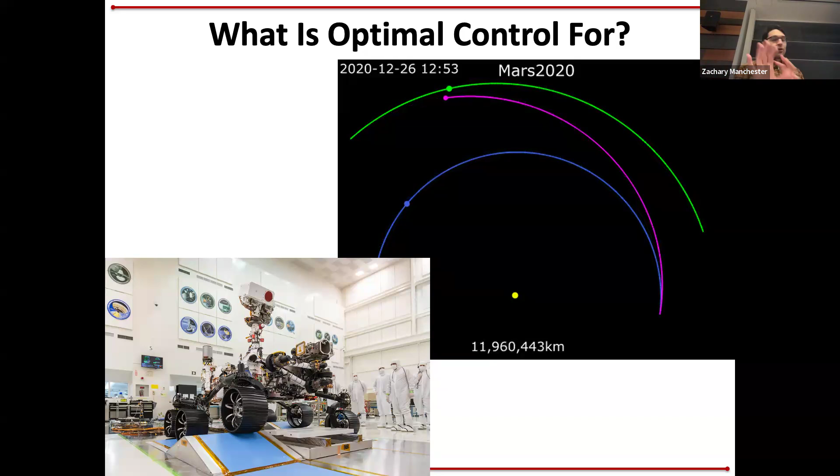Sort of veering away a little bit from this classical case, but still very much in the aerospace vein, like another application for this stuff that's super current still, but from the traditional aerospace end of things, is landing rockets. Everyone's seen SpaceX land these things on barges. Anyone know how they do this? Yeah, there's like some convexification thing they do.

Yeah, so this was a seminal result about 10 years ago in control, in aerospace control. This guy, Lars Blackmore, another guy named Behçet Açıkmeşe. Lars now is the kind of GNC, head of GNC, basically head of control stuff at SpaceX now. And Behçet is a professor at University of Washington now, but they were both at JPL at the time, like 10 years ago. They figured out a really clever trick to turn this nonlinear, non-convex problem - to relax it into a convex problem.

So we're going to talk about this in the class. We're actually going to go through this as a case study later in the semester and show you exactly how this works. But basically, it's a magic math trick that sort of transforms this problem exactly from a nonlinear problem that's hard to solve into a convex problem that's easy to solve, and you can give all kinds of guarantees for it, and you can solve it fast online. So this was a beautiful theory result that ended up really quickly getting ported over into real applications. So these guys use it to land, and also JPL uses this stuff to land on Mars. Really cool application where a theoretical result really quickly went from academic paper to landing rockets, which is kind of awesome.

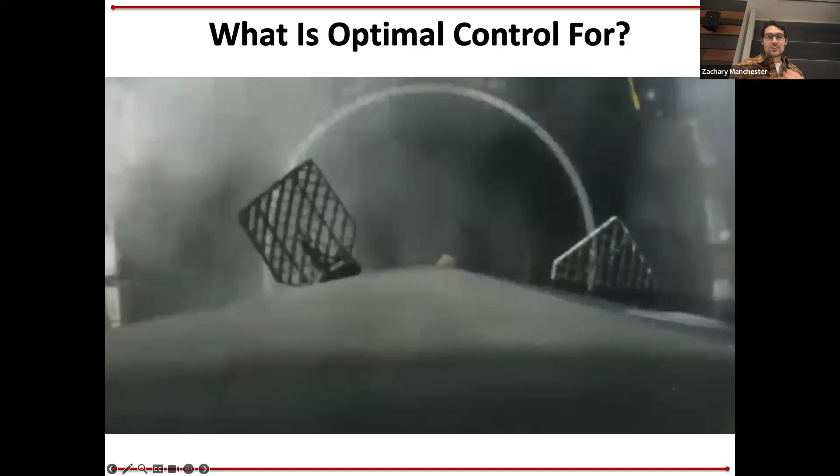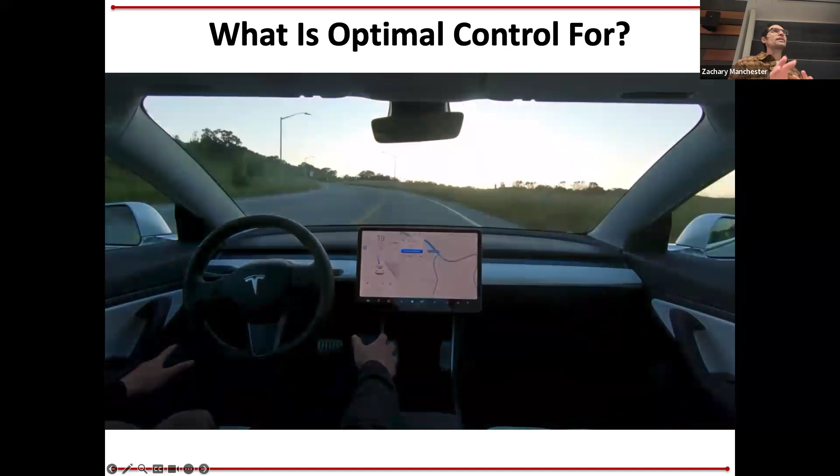Autonomous driving. Everyone's seen this stuff before. There's lots of buzz about how everyone's using deep learning to do this stuff, but that's mostly on the perception side and modeling human behavior. The actual driving of the car in almost all cases is still MPC.

People are doing nonlinear MPC with simple single track bicycle models for this stuff. They're using all this learning stuff to do perception, figure out where the other cars are, predict what human drivers are going to do, and feed that into an MPC stack at the end of the day that's actually planning trajectories, reasoning about the dynamics of the car, tire friction, all that kind of stuff, and doing the actual driving.

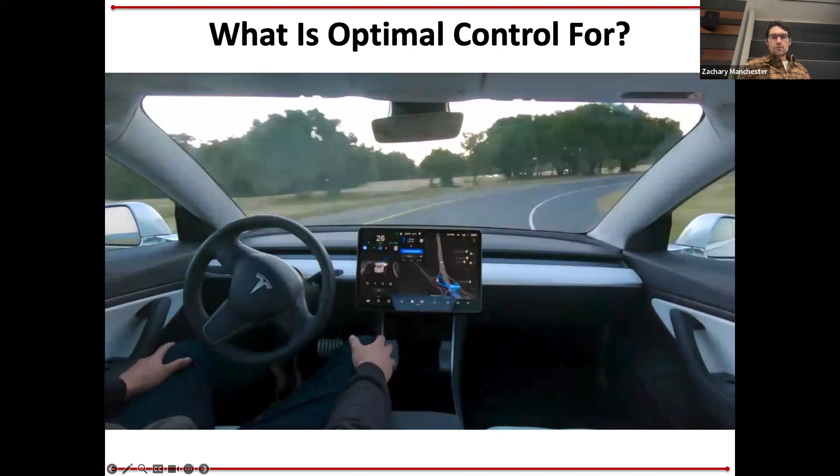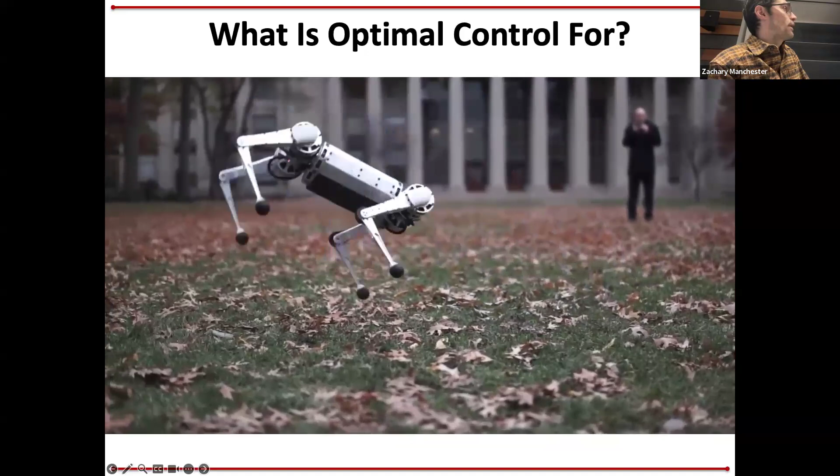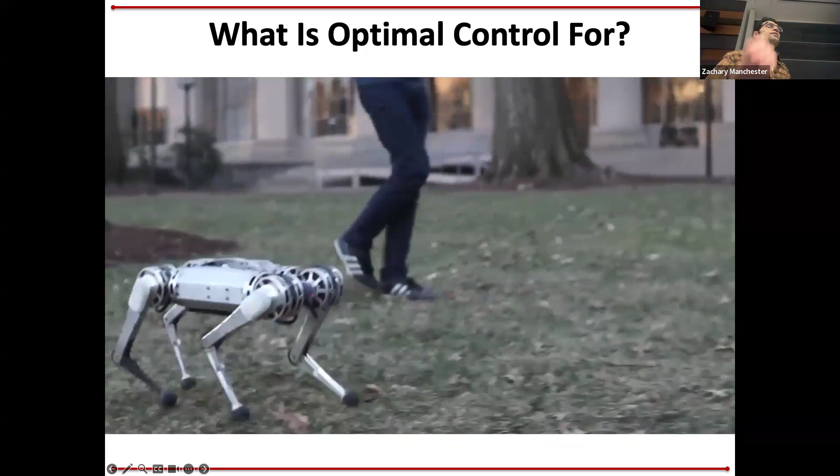What else we got? Everyone's seen this stuff too - this is getting kind of old, but more recently there's been a lot of RL results where people have really gotten RL controllers to work super well on these kind of robots. But the default controllers still on those quadrupeds are MPC, and there's a bunch of tricks in there to deal with non-smooth contacts and how the feet touch the ground.

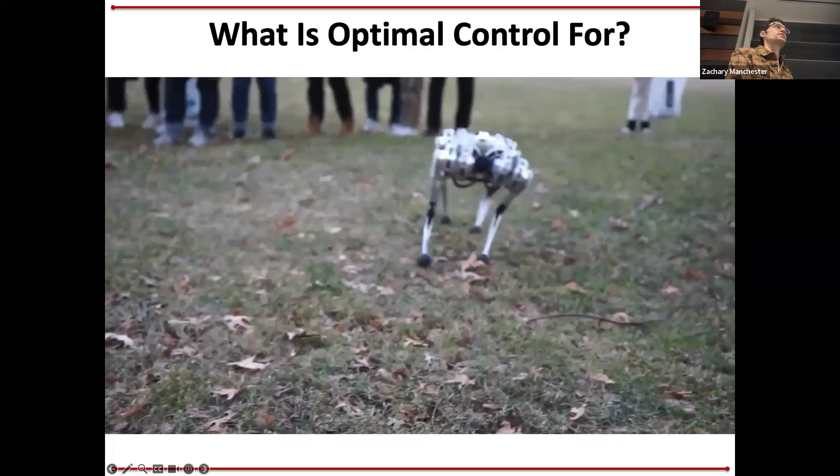We're going to talk about that later in class. So lots of tricks, but at the end of the day, this boils down to some pretty simple MPC with a bunch of heuristics for most of the legged robot stuff.

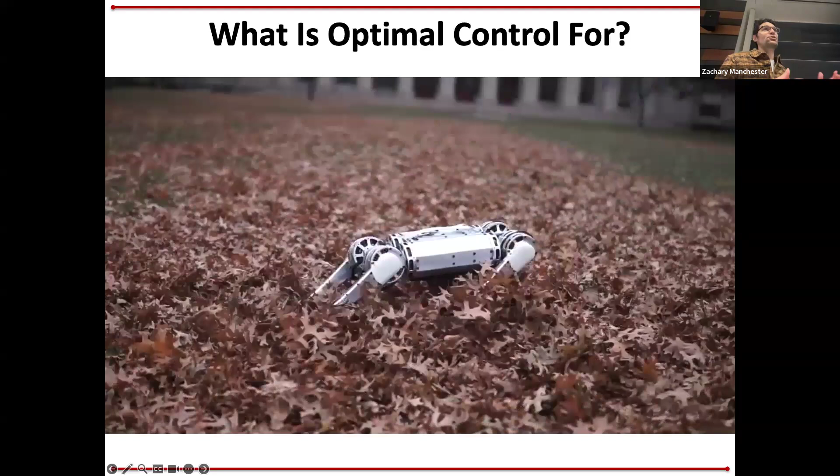The MIT Cheetah - Sangbae Kim at MIT really pioneered getting these things to work. Now these things are basically a solved problem and you can just buy them, but like 10 years ago this wasn't really possible. So it's really come a long way in a relatively short amount of time.

And mostly still MPC. Just in the last year or two, RL controllers have started to catch up to the MPC stuff and in some cases outperform MPC. But this is all MPC. We're going to talk about that stuff later in the class.

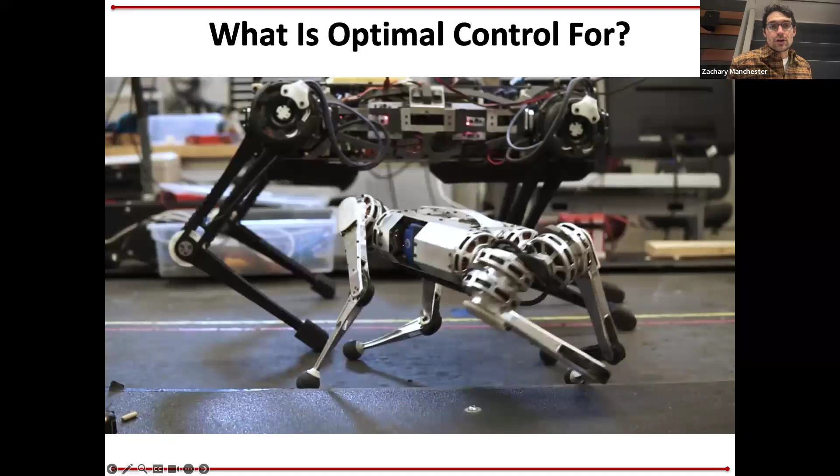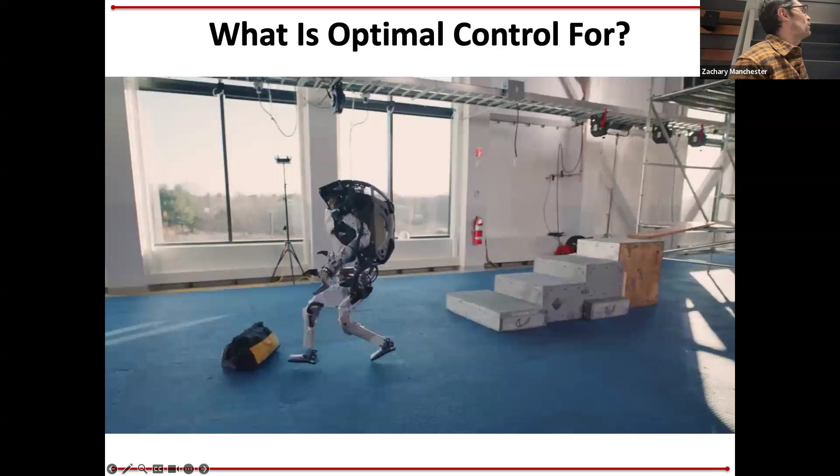And then obviously this stuff, humanoids. I actually went looking for new ones - everyone's seen the new Atlas, the electric one. There aren't very impressive demo videos of new Atlas out yet though. They're doing like factory manipulation stuff that just isn't that cool looking. So this is one of the cooler, recent-ish ones of them doing pretty dynamic manipulation and running around and backflips and all the good stuff that we've all seen on the old Atlas. No new Atlas videos doing this kind of stuff yet.

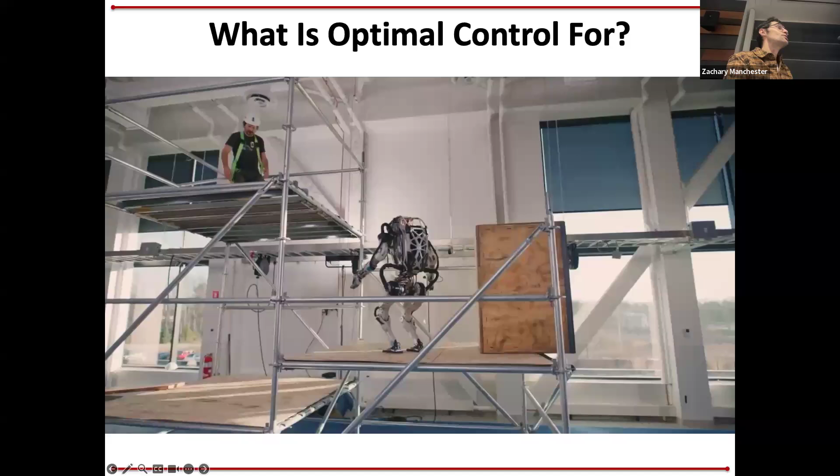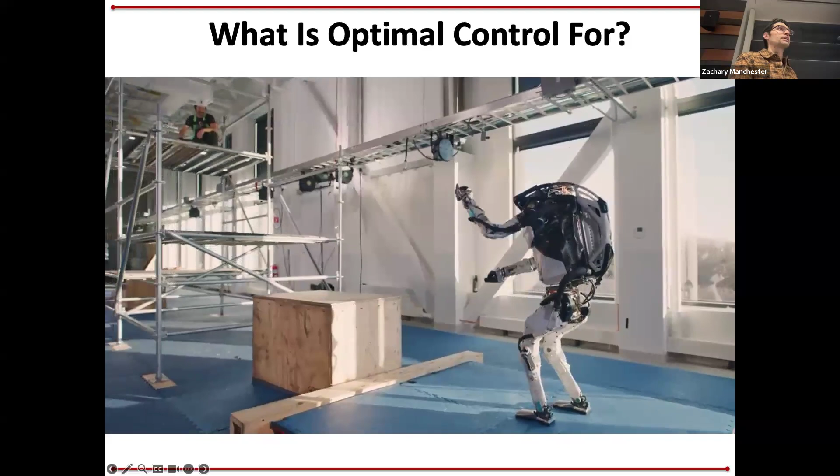But yeah, this stuff is all nonlinear MPC. This is them doing basically really hardcore nonlinear MPC with a whole body model of the robot, models of objects in the world, models of the contact dynamics, contact interactions between the robot and the world, and essentially just solving these really gnarly, pretty big nonlinear optimization problems at like hundreds of hertz in real time and running on the robot. So we'll talk a little bit about how this gets done too.

Any questions about any of this stuff? This is all the fun stuff. Just want to tease all the good stuff.

So I think pretty much everything I just showed you, we're going to do actually later in the semester. We're going to do case studies where I'm going to give you guys papers, recent-ish papers on all of these really cool, recent-ish robotics applications of this stuff. And we'll go through some of the secret sauce, how it works, and give you a fairly decent idea of how this stuff.

So by the end of the semester, at least at a high-ish level - I mean there's lots of details obviously, and the implementation work is tricky on all this stuff - but at least at a fairly in-depth level, you'll understand how all this stuff gets done, how to implement, in principle, controllers for these kind of systems, which is pretty awesome.

Okay, so just looking ahead, right? Like we do this stuff in our lab for our research - where are the current challenges and where's the hard stuff now? That stuff I just showed you is all kind of the last 10 years of awesome stuff. Where are we looking now into the future?

I'd say contact interactions are still a big deal. Planning multi-contact, long horizon, say manipulation or locomotion things, is still really hard.

That comes down to the fact that these contact dynamics, where you're making and breaking contact, are non-differentiable. So all the nice gradient-based optimization things we like to do kind of break. You can think about this as the limit of a very stiff but smooth nonlinear process, which is gross for gradient stuff, or as a discrete combinatorial optimization, graph-searchy kind of thing. Both are bad for different reasons: the graph search blows up combinatorially, exponentially in the size of the problem, and becomes intractable pretty quickly. The smoothed version ends up ill-conditioned and stiff in bad ways, suffering from local optima.

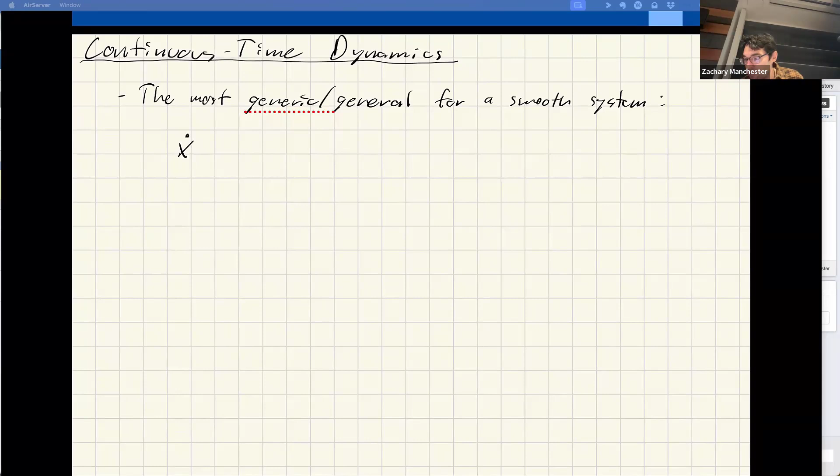Okay, so we're going to have a function that looks like this. So when we say dynamics, we mean this function, this f. This is called the dynamics. And it's a function that takes in a state vector - so that's the x, it's called a state.

And in our case, because we're doing control stuff, the u here is the input or the controls. So these two things are vectors. We generally say the state is a vector in Rn, so n-dimensional vector. And then the input is in general a different size vector than the state, and we usually use m for that dimension. So Rn, Rm - unfortunately those sound very similar, so it's confusing when it's said out loud.

And then this guy, x dot, this is the time derivative of the state vector. So this is a first order ordinary differential equation. That's what this is. You're maybe, if you've taken a basic dynamics course and you've seen F equals MA, Lagrangian stuff, that's a second order ordinary differential equation, right? So A is Q double dot, right? It's second derivative, it's acceleration. So, but we can always write this stuff in this form of a first order ODE.

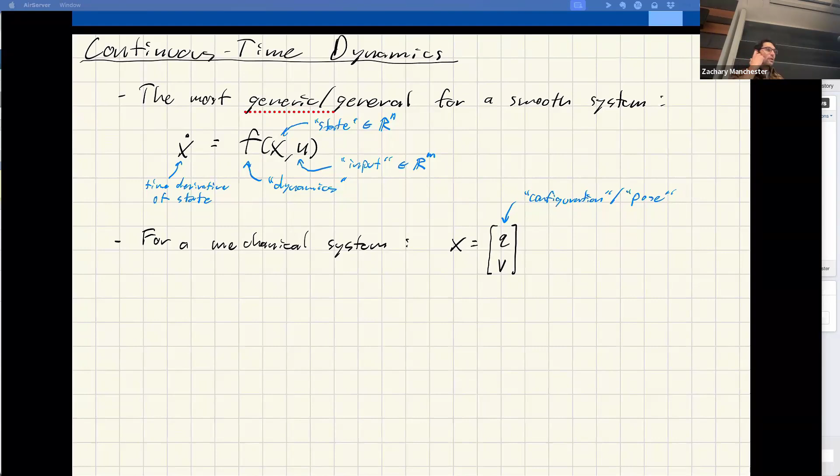So in particular, what I'm getting at is if I talk about rigid bodies, I talk about orientation, we have position and then we have attitude, or orientation. Attitude is not a vector. You can write it as a stack of 3 or 4 numbers, but those don't add like vectors. If you do roll, pitch, or switch the order and do pitch, roll, you get two different orientations. So that does not add like a vector. That's a more complicated, weird group thing we're going to talk about in the class, because it's super relevant to robotics, but more to come on that.

It's a weird thing, so to be clear, this is not always a vector. It can be some more complicated Lie group or manifold thing that has more structure, which we'll talk about. And then this V down here is the velocity. So fun fact: even if Q is not always a vector, V always is a vector, which is kind of weird and not obvious why that's the case. More to come on that, we'll talk some more about it.

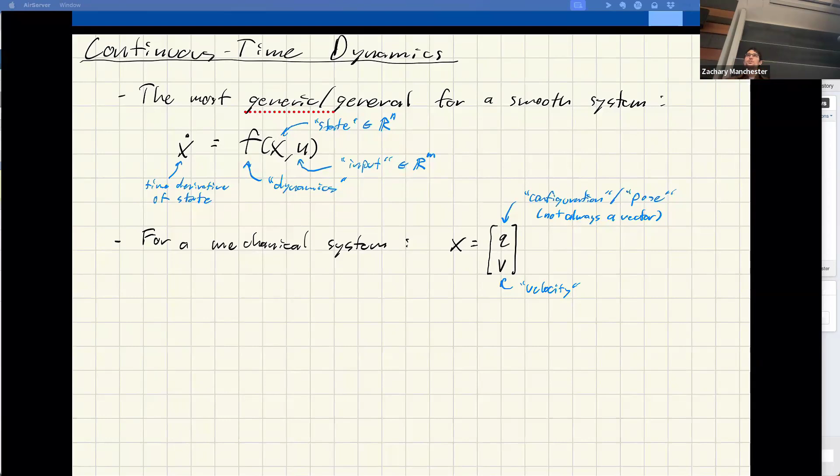Okay, so this is what we mean by dynamics, this is what we mean by a state vector. Basically, the state vector is everything you need to specify the initial conditions of a system. That's what it is. So in general, that's like a position and a velocity, pose and velocity, that kind of thing. And then you can write your dynamics down like this. So whatever you've got, no matter how you got it, you stack up a big state vector such that you can write down some big nonlinear f of x,u like this.

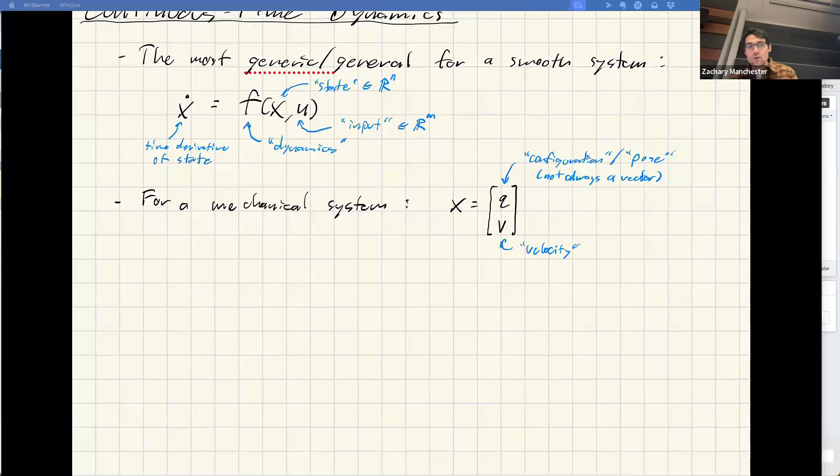Okay, so now we're going to do a concrete example just to make everyone feel good and show you something that I'm like 99% sure that 99% of you have seen before. So we're going to write down a pendulum.

Okay, so again, I expect that you've all seen this before. So we've got some kind of ground ceiling thing, we've got a mass, we've got a length, and we've got an angle theta to describe the pose.

If you've taken any kind of dynamics course, freshman physics, whatever, you've seen this before. So the dynamics of this guy, as hopefully we all know, I'm not going to derive it, looks like this: m l squared theta double dot plus m g l sine theta. Since we're control people, we're going to have a torque on the other side of this so we can control it. Again, in this class, we're not going to make you derive this stuff, we're going to give you the equations, but you're going to have to work with the equations.

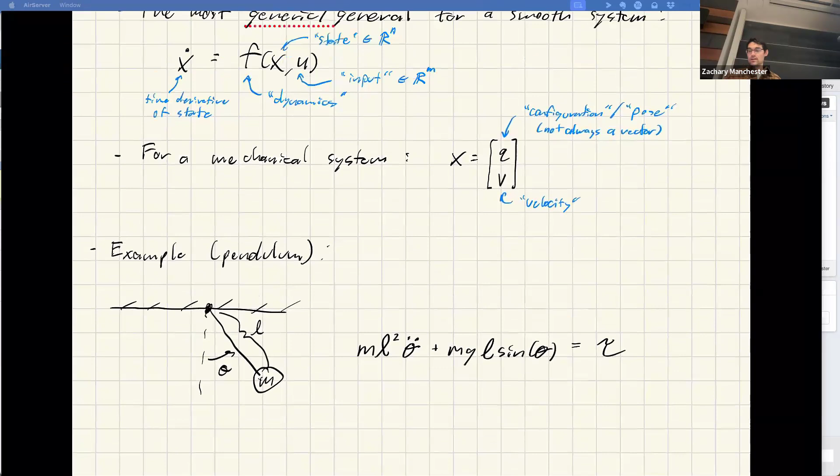So this is hopefully what you've seen in freshman physics. Now what we're going to do is massage this into this f of x,u form up here. Right now this is like I did F equals MA, I've got a second order ODE, so we're going to map this into the stuff we just saw.

So in particular, what's our Q? Good, Q is theta. What's our V? Theta dot. And what's our U? Tau. Okay, cool, so now we've got the variables figured out for this standard form. So now our X is going to be theta, theta dot.

Our dynamics equation is going to look like X dot, which is theta dot, theta double dot equals, and the top one's trivial because that's already in the state vector, so that's just theta dot. And the bottom one, I'm going to take that ODE and massage it around to solve for theta double dot. So this turns into minus G over L sine theta plus 1 over ML squared U. So this vector equation is my f of x, u. This is my dynamics.

Questions about this? I think your V is supposed to be theta dot. It is. Oh yeah, thank you. Okay, cool. Anything else? Did I do anything else stupid?

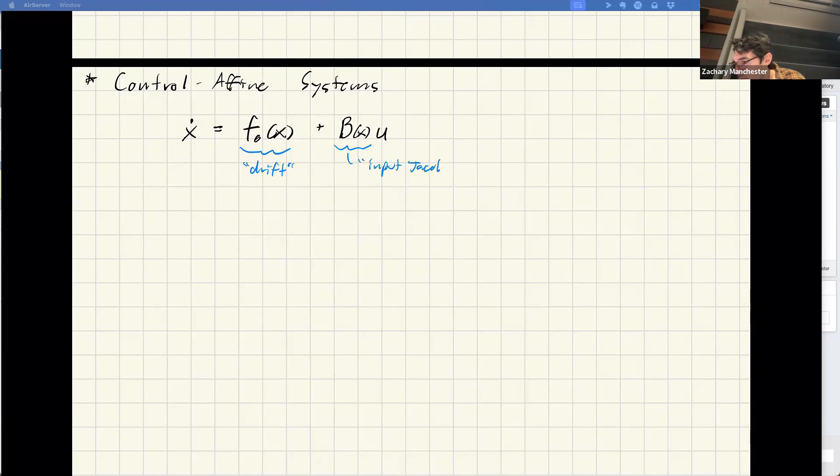Okay, so why are we even talking about this? Turns out this is super useful in control stuff. This shows up a ton in classical robot manipulator stuff. And it turns out that pretty much every mechanical system can be written in this form. So most systems that you would care about, basically, can be written like this.

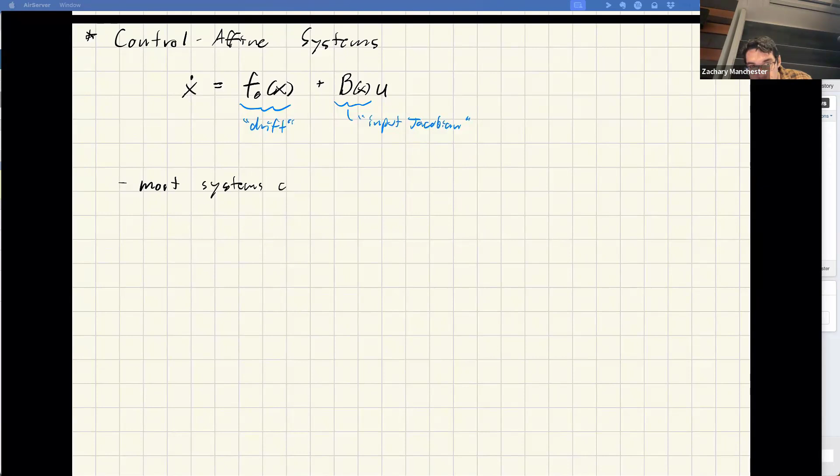Going back to everyone's favorite nonlinear system, the pendulum. Just from the stuff we showed above, I'll show you the drift term: theta dot minus G over L sine theta. I'm just picking the terms out of here, factoring the U out. So that's your F, and then the B, the input Jacobian, is 0 and then 1 over ML squared.

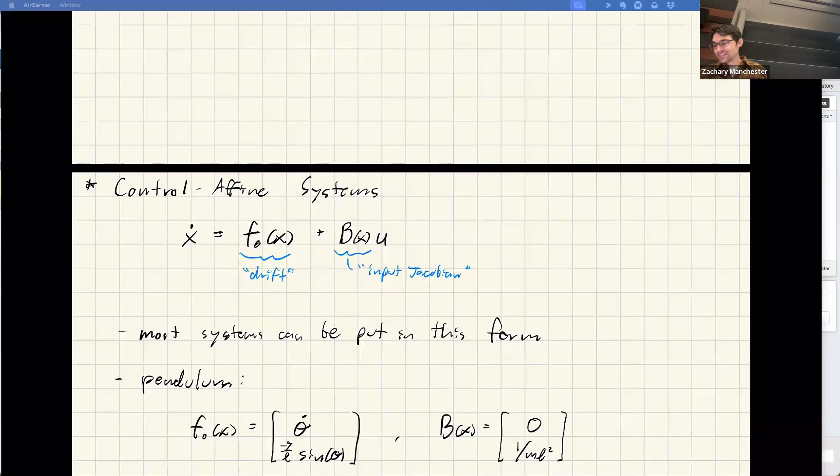So it's not immediately obvious why this is useful. We'll get to it later, but you should know it shows up a lot. It's convenient, and most of the systems you're going to deal with, even if they're nonlinear, are actually control affine. So that's cool.

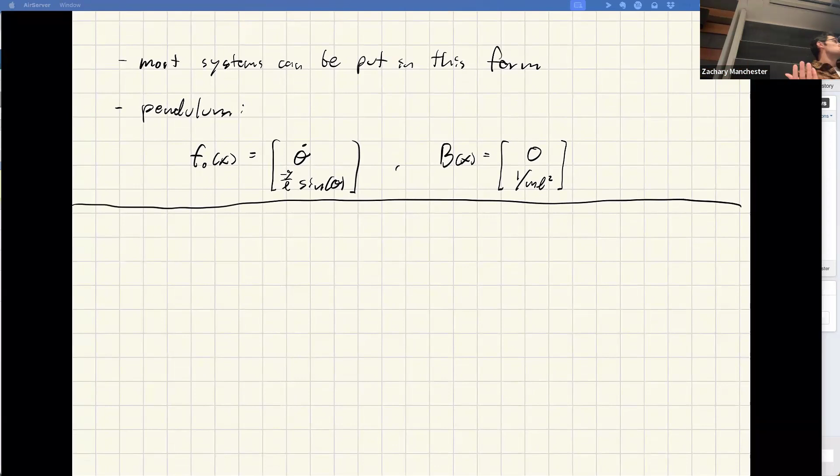Next, a more specific class of dynamics. In general, I have a fixed x. F of x doesn't have to be 0, right? This F naught, even if x is constant, is not 0. And the B times U, if U is non-zero, that term is non-zero too. So it's non-zero in general, even if x is fixed.

So the real magic of this, and the reason it's worth talking about, is if B is full rank, I can invert this equation and solve for U such that I can make x dot arbitrarily anything I want. That's called being fully actuated. And that's a classic trick done all the time in robotics called feedback linearization. It's basically how you control classical manipulator arms. If that B is full rank, you can make the system do anything you want.

And it's sort of controlling, it's trivial, right? That makes sense? Okay, foreshadowing and fun hints. Any other questions?

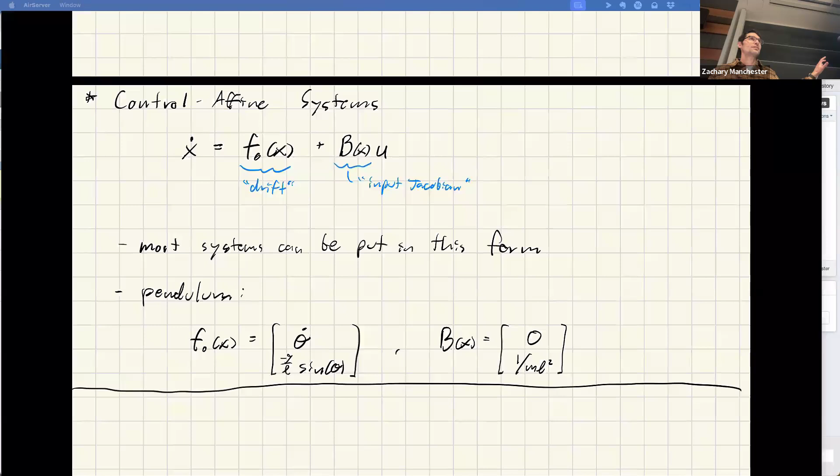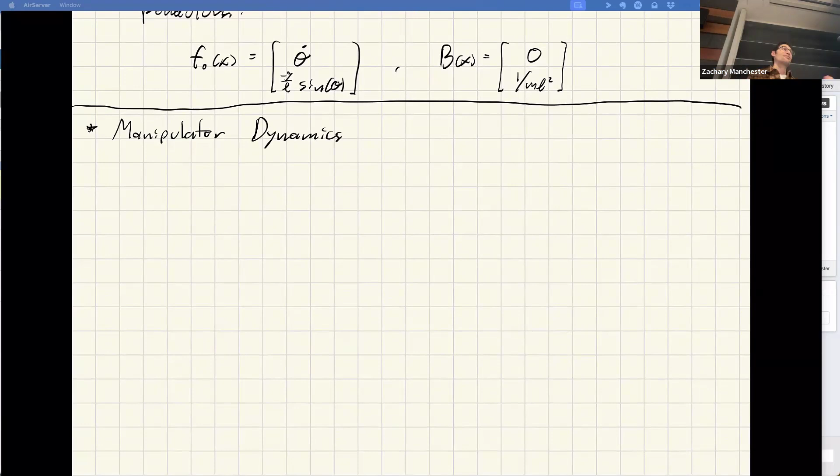Next, a more specific class of systems that we will see all the time, especially if you're a roboticist, are what are called manipulator dynamics. Anyone heard of this before? Show of hands. Good. If you've seen this before, you've seen control affine before, because this is control affine.

Here's what manipulator dynamics look like. We've got a mass matrix that's a function in general of the pose or configuration, M of q, times v dot, the acceleration. We have this C term, kind of called Coriolis or dynamics bias, a function of q and v. And then on the other side, we have an input Jacobian times u, and then we can have other kinds of generic forces. I'll label all these.

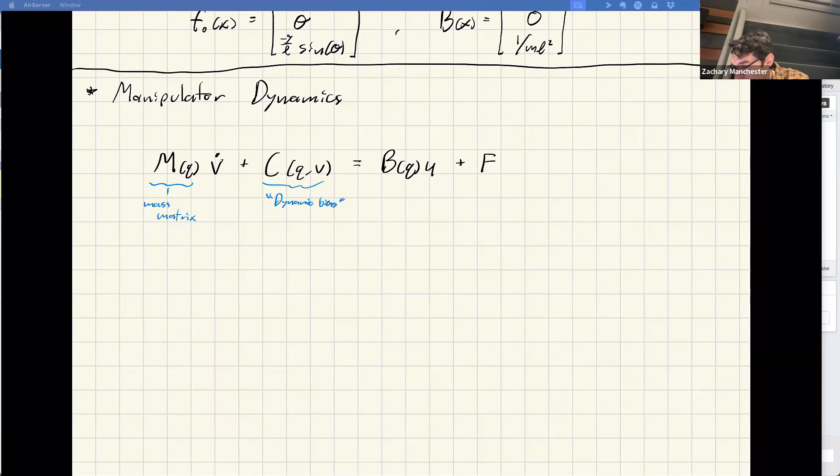So this guy is M, the mass matrix. This C term is often called the dynamics bias, which includes Coriolis terms and gravity. B is again the input Jacobian. And this F over here is just any other external forces on the system, like anything except your control inputs, basically. It could be contact forces, could be anything else, right?

In addition to this, so this is the dynamics. If we want to write down the full state equations for the system, we also need another piece of the puzzle, which are these kinematics. In general, those can be complicated. So far we've seen stuff where q dot equals v, and that's kind of trivial. In general, q dot can be a more complicated function of v.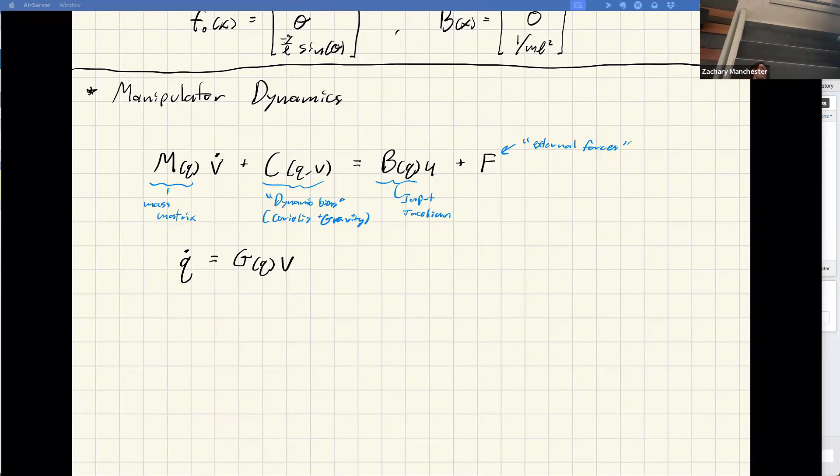We're going to see systems that look like the following: there'll be some kinematic Jacobian g that's a function of q times v. So in general, q dot can be some sort of function of v. Does that make sense? Anyone know where that shows up in particular? Anyone seen that show up before?

Yeah, I was going to say attitude, but I'm not sure. Totally, so it's anytime that the velocities are not the q dots, which shows up if you use a quaternion. If you have a quaternion that's 4-dimensional and an omega that's 3-dimensional, obviously q dot doesn't equal omega. So it looks like that. Or if you have a rotation matrix and an omega, they're different objects. So you have to impedance match your angular velocity into your attitude representations. That's what this is all about.

So that's one version of it that shows up in many general settings. Any questions about that? All good? Okay, so this thing, we'll call this the velocity kinematics.

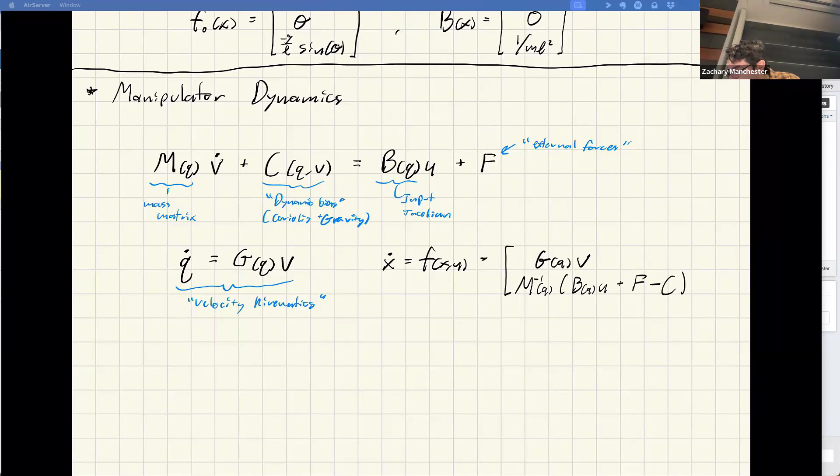This shows up a lot when you have attitude. That's kind of generically where we see it. And if you've got this, you can always very easily turn it into our generic f of x. Up here you've got your velocity kinematic stuff to get q dot, and then v dot you're just going to invert the mass matrix and move everything else over to the other side. So you can always get it back into that form.

Questions about that? Cool. So back to everyone's favorite nonlinear system, the pendulum. We'll put it in this form. For the pendulum, again, we're just going to refactor a little bit. So for the pendulum, the mass matrix, also if you're fancy you can call this the generalized inertia tensor, is ml squared.

If you've taken any kind of mechanics course, what is ml squared? Inertia. It's the inertia of the pendulum, right? The Coriolis term here, or Coriolis-gravity term, is mgl sine theta. The input Jacobian is just identity. And in this case, if we've got theta, theta dot, the kinematic Jacobian is also just identity. So easily we can put the pendulum into this manipulator form.

Why do we care about this manipulator stuff? Number one, all mechanical systems can be written this way. So pretty much all multi-body, rigid body robot systems can be written this way.

Anyone know why that's true? Why does that have to be true? You have any insight? You're getting close, yeah. So this kind of looks like F equals ma, right? It looks like a weird sort of generalized version of F equals ma in some sense.

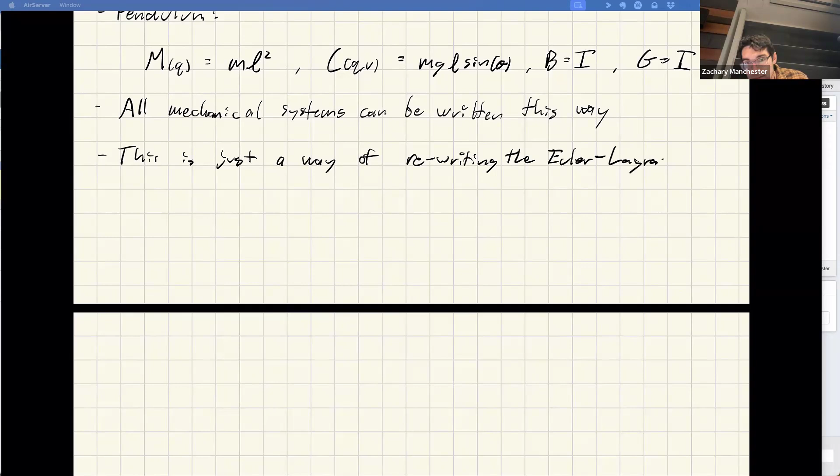And in particular, so that's true. Let's see. This is just a way of rewriting the Euler-Lagrange equation.

In particular, for the following Lagrangian, I have kinetic minus potential energy, for those of you who've done this before. This is just kind of a fun fact. I have a kinetic energy that looks like this, and then a potential energy, which we'll call U to avoid notational overloading. And I kind of turn the crank on the Euler-Lagrange stuff, and I get the manipulator equation. Bonus point for anyone who actually wants to go derive this and show that they're equivalent. Throwing it out there. So yeah, this is the kinetic energy, and this is the potential energy.

Cool. Questions about that? The other big reason why we're talking about this is that all the robotics toolboxes do dynamics in this form. So if you're going to use any of the software toolboxes that do dynamics, you kind of just need to know how to work with this stuff.

So this is a fun one. Can anyone tell me about this M matrix? There's certain things that have to be true, this M matrix has to have some structure to it. And it's sort of obvious from this kinetic energy. So based on this kinetic energy right here, can you tell me something about that M?

Yeah, basically some people threw it out. So basically this M, it corresponds to like a mass, right? It's basically just a mass rewritten in weird coordinates, in joint space coordinates in general for us. And because it's mass, it corresponds to a quadratic form here. So because it's in that quadratic form for the energy, it has to be symmetric.

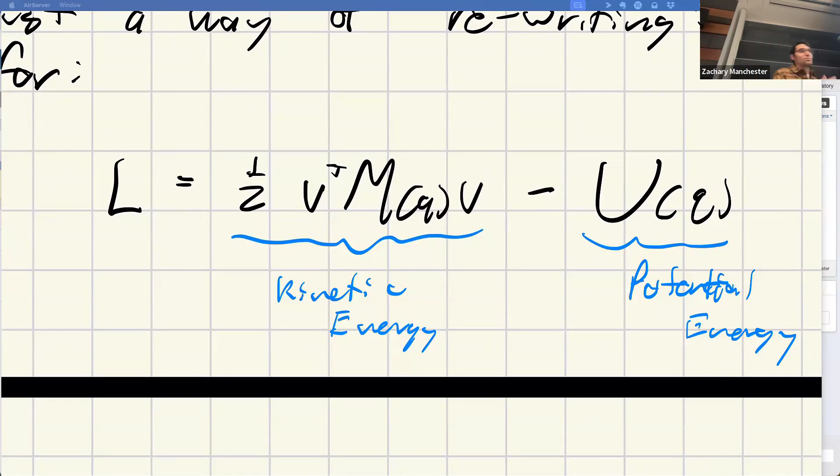Why is the input Jacobian a function of the state space? It's a function of the configuration. For a mechanical system, control affine is more general, we say B of X. For a mechanical system, it's only a function of the Q's. This is basically an artifact of Lagrangian mechanics and how that looks. If you write down the Euler-Lagrange equations, it just falls out that way. This actually comes from the potential energy thing.

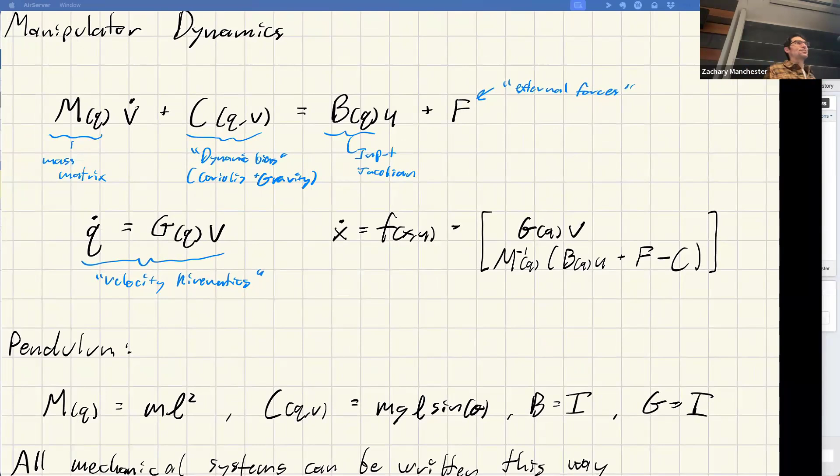If you have a conservative force, it's not a function of velocity. Even non-conservative forces, like air drag or friction, will be velocity dependent, but that doesn't fit into this kind of form. Joint torques enter the equations that way, but other things can be velocity dependent, and we're just shoving that into the F. It's basically the way we've structured these equations. We've pulled out the stuff that corresponds to joint torques and thrown them in there, and anything else that doesn't fit that recipe, we throw into F. I don't think there's anything deep behind that.

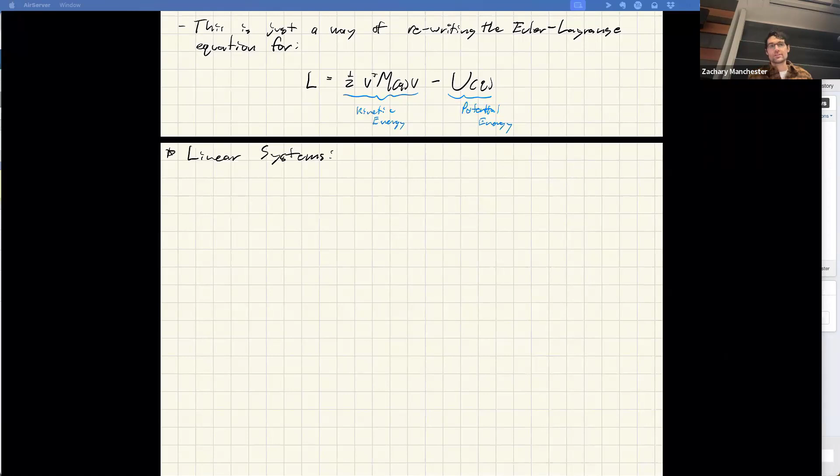Okay, anything else? Cool, let's see what else we're going to talk about. We're getting short on time. Another class of systems that we're going to spend a lot of time on, that are bread and butter of controls you should absolutely know about, are linear systems. Who's taken a linear systems theory course? So like a quarter of you. We're going to do some more crash course material on this stuff.

These look like the following: X dot equals A, which in general can be a function of time, times X, plus B, which again can be a function of time, times U.

This is called time invariant, linear time invariant, if A of t is a constant and B of t is a constant. It's called time varying otherwise, linear time varying. These are the bread and butter of control theory, so you're going to see this stuff a lot.

One of the reasons these are so popular, they're really useful for analysis and for control design, in particular because if we ever run into a nonlinear system, as long as it's smooth, we can always take derivatives and linearize it and approximate it as a linear system, which we're going to do all the time because it turns out that works really well, like 80, 90% of the time.

Say again? Yeah, like if your dynamics are linear, you can write the control problem down as a convex optimization problem. Yeah, so we're going to talk about that too.